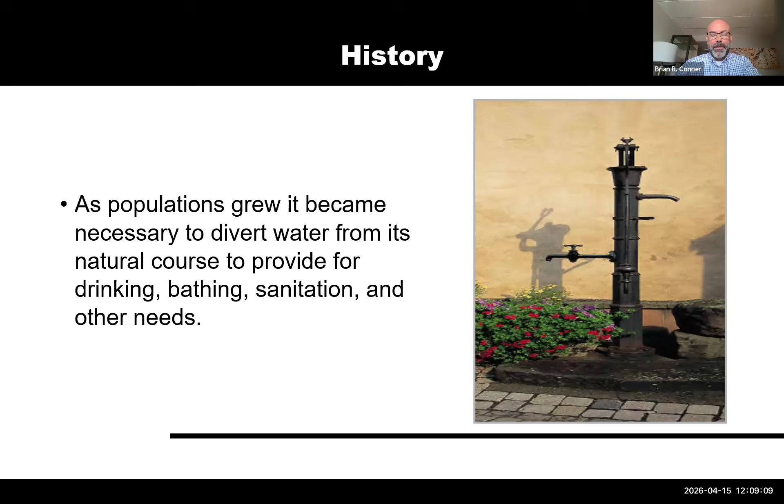As man civilized and population grew, it became evident that water needed to be diverted from its natural course and brought into towns and villages for a number of different things: drinking, bathing, sanitation, and other needs. But not only diverting the water into these areas where people were living, but also taking the water that was used away.

This also illustrates the value that even ancient civilizations found in bringing water into villages for those necessities. The thing is that once the water is used, you have to take the sanitary waste away. It is critical for the health and safety of the inhabitants of villages years ago, and also just as critical for the inhabitants of buildings today where we're bringing water in.

Over the years, aqueducts have fallen out of favor. Nobody is really using those anymore, but folks have been manufacturing pipe and fittings for a really long time. Some, like the aqueducts, served ancient civilizations really well and worked during their period of time until advancements came along. You've had piping systems made of clay, of lead, of bronze, and of wood.

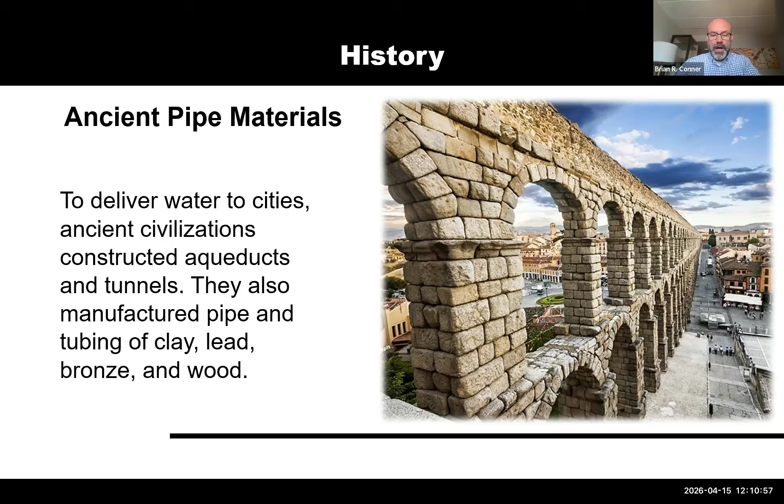Previously, when this product was manufactured and installed, it was coated with tar, so those annular spaces were filled in. But this served to bring water into villages and townships, to deliver potable water to folks for those sanitary needs.

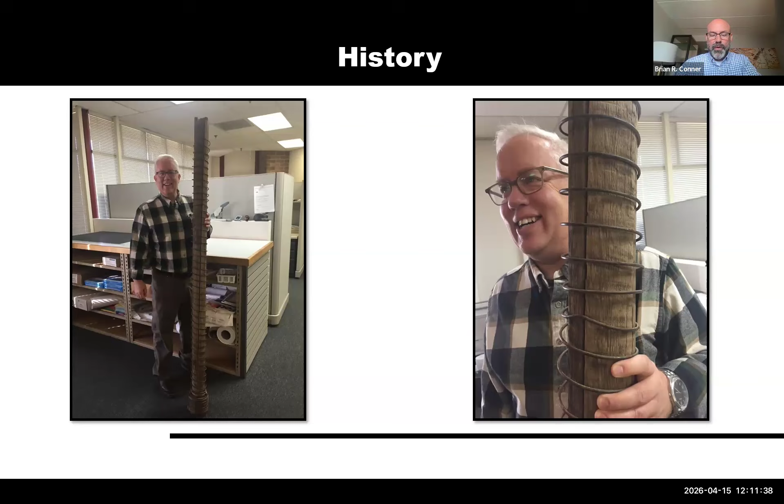Now, obviously, we're not installing lead or bronze, wood or clay pipes much anymore, but a material that's been around for a very long time, cast iron, is still widely used. Cast iron was originally invented by a German cannon maker in Germany in 1455.

So the pipe and fitting system that we all know and love today, mostly referred to as MJ, also known as no-hub pipe and fittings, was invented by a German cannon maker who didn't have much need for cannons. There were no conflicts. He wasn't selling many cannons, and he was spitballing how he could make some money. So he used his cannon molds to make cast iron pipe.

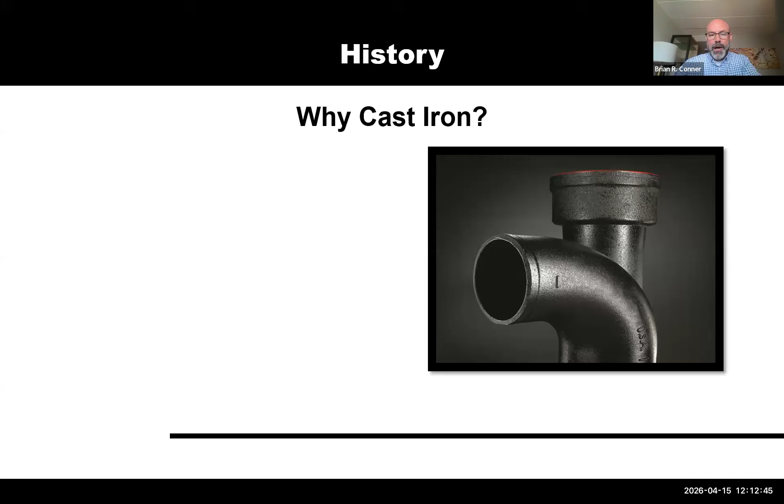And the thing about cast iron is that it has been around for a really, really long time. But in today's environment, some folks have noticed that there are applications that have become corrosive to cast iron and have been causing some breakdown. That's sort of what happened with other materials, lead, bronze, clay, wood. Frequent deterioration made them less appealing, and we don't want the same thing to happen with cast iron. What's interesting to note is that cast iron hasn't changed since that German cannon maker was making it in 1455, in terms of its chemical makeup.

So why is it that now there are some applications that are corrosive to cast iron? Well, things do change, and some of the applications have changed. We're in an age where people are clamoring for low flow fixtures. Since COVID came along, people are really keen to make sure they're sanitizing things, whether in a restaurant, a hospital environment, or even a standard office building. The cleanliness of the building has changed, so there's a lot of aggressive cleaning chemicals going down the drain. And in a low flow fixture building, there's less water scouring the solids flowing through there. The way we've changed the applications using cast iron and other materials have caused an environment that can be detrimental to many materials, not just cast iron.

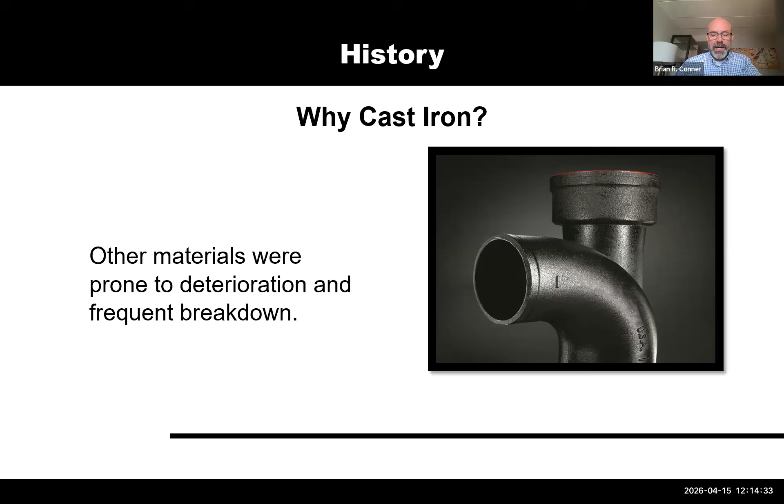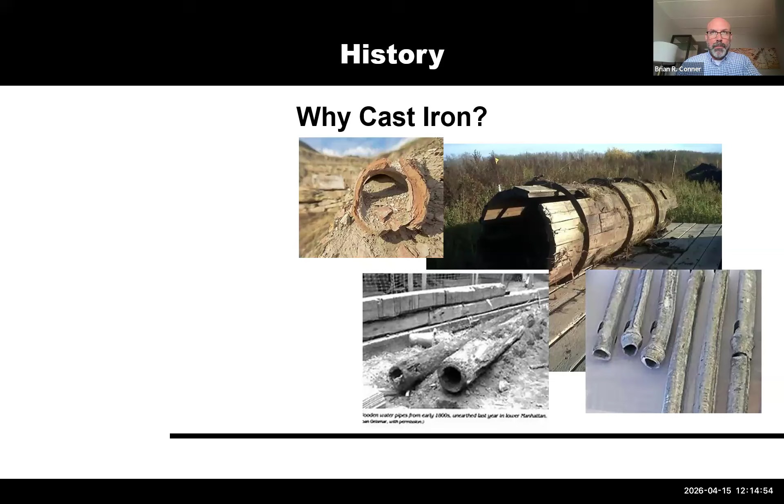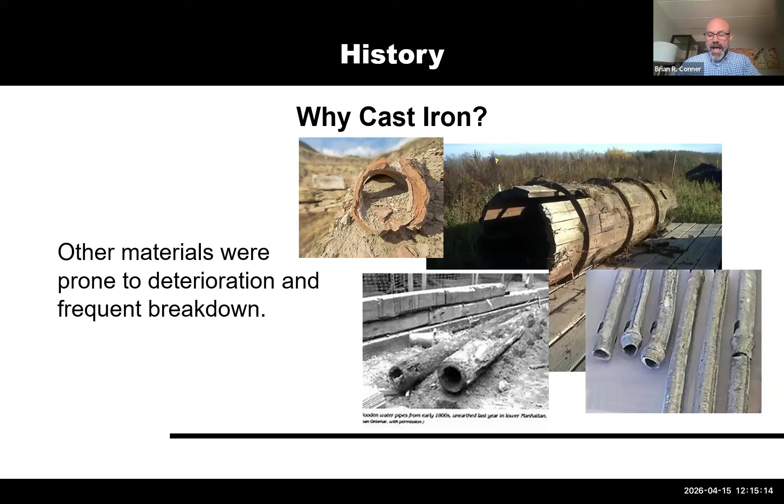But the focus of this presentation is going to be on cast iron and what we can do to rectify it. Before we start, take a look at some others that have predated iron and fallen to the wayside, like lead and wood. They're well documented cases of how those have deteriorated and become historic monuments to the way folks did things before. Cast iron still has its place in our industry. It is still a very durable material, and specifying engineers are still happy to use it. But there are some questions about those aggressive applications and what the industry is doing about it. So we wanted to take you through a presentation, give you a little history, and tell you what the new and most cutting edge technologies are to help use cast iron in the applications you've always used it in. But first, we wanted to highlight a few things that show the durability of iron.

Here's a picture of the Palace of Versailles, which was installed in 1664. On that palace, cast iron, just like the cast iron we use today for drain, waste, and vent, was installed as pressure piping, and it was used for pressure piping from the early 1600s all the way up until about 1900. Then with the advent of sanitary standards for drinking water, cast iron fell out of favor, and now it's not used to convey drinking water, but still used for sanitary use. This cast iron pipe used in the Palace of Versailles is still in service after 362 years and still operating as it was to begin with.

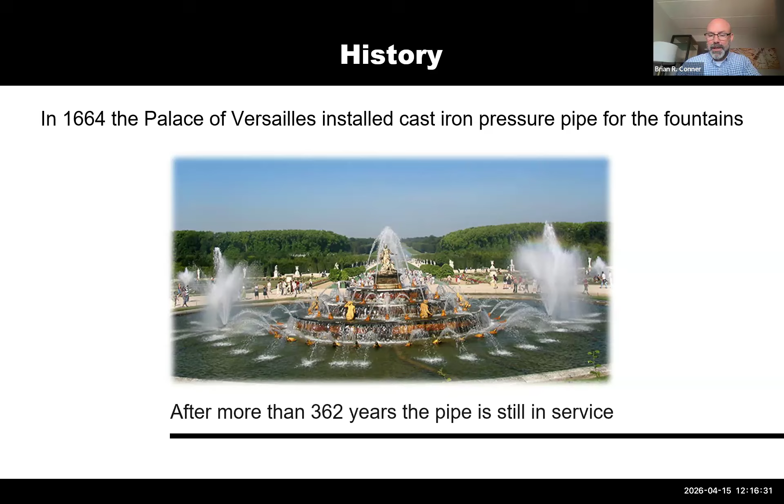So it shows the versatility and also the durability of cast iron. Nowadays, we're not using it to pipe pressure water to any fountains or anything else. We are still, however, using cast iron for sanitary drain, waste, and vent applications, storm drainage, and sewer. For these applications, most commonly in the Canadian market, you would use your no-hub pipe and fittings, most commonly referred to as MJ pipe and fittings for the mechanical joint couplings that connect the pipe and fitting systems. These can be used in above ground or below grade applications, and they're used all over the world for that. Most commonly, folks who intermingle materials with cast iron would use plastic underground for ease of installation, and cast iron or plastic underground and cast iron above ground. The caveat is for cast iron, the temperature limitations are about 100 degrees C, which is really high. But for plastics, it's much lower, around 60 degrees C.

For cast iron, it's designed and rated for gravity drainage. You have to have the sanitary patterns so that the water is essentially told where to go with the sanitary turns. And even though it's not meant for pressure applications, you should test your cast iron system to make sure it is watertight to 10 foot of head, which is roughly around 4.3 psi.

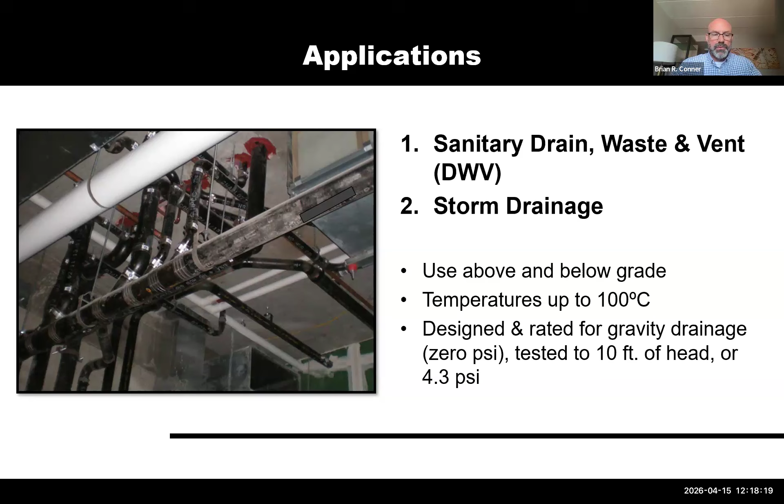Another focal point that points to cast iron itself and how durable it is, is the Smithsonian Institute in Washington, D.C. This is an advantage of cast iron over a lot of materials: its longevity. We're all familiar with the Smithsonian Institute. In 1881, construction was completed. In 2010, engineers and architects began a renovation of the institute, and they did an evaluation of the cast iron pipe. It had been in service now for almost 130 years, and found that the pipe still met the specifications. So it was left intact. The original cast iron that was installed in 1881 is still in the Smithsonian.

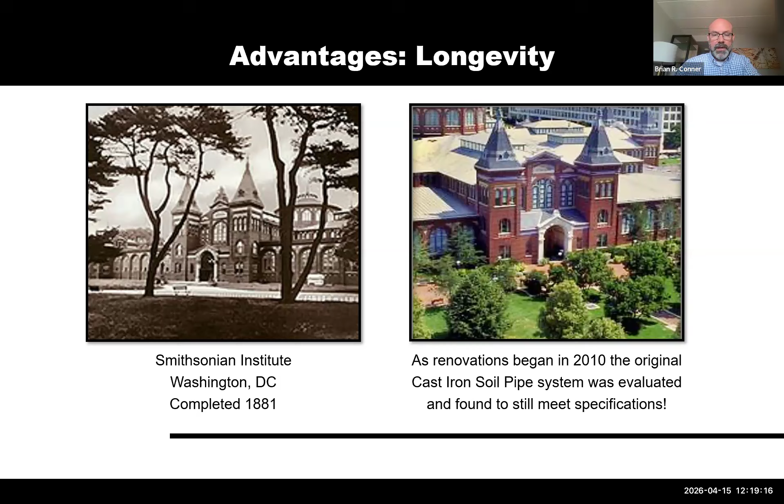There's plenty of other case studies that would show the durability and longevity of cast iron. But there are other things that make cast iron a very attractive material. One of those is sustainability.

Every piece of domestic cast iron manufactured in North America is manufactured from 96% post-consumer recycled scrap, and all cast iron is 100% recyclable. So in this day and age in North America, nearly everything made from cast iron was formerly some other form of cast iron, whether it be an engine block, a brake drum, or a radiator heater.

Or maybe even cast iron soil pipe on a building that has been demolished. The other 4% of that equation that is not the 96% post-consumer recycled are just additives that have to go into the manufacturing process to keep the chemistry right, and also to process the material itself. So a little bit of shredded steel, some coke for heating, and things like that. But all of the cast iron in the production of domestic cast iron or North American made cast iron is recycled cast iron.

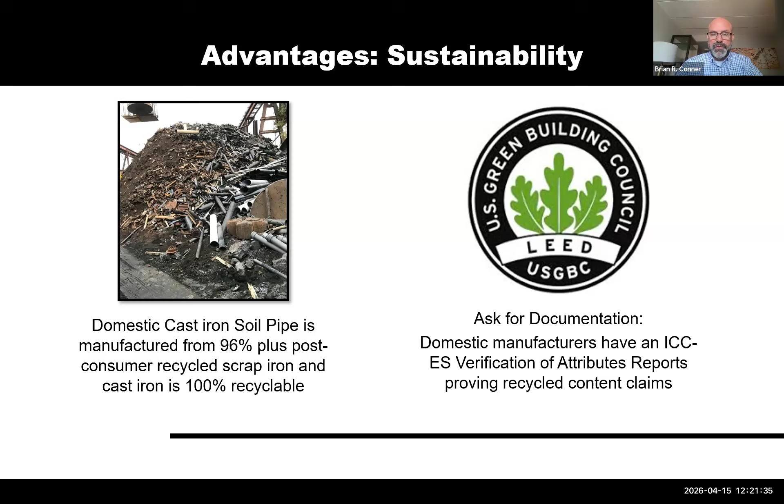Now, manufacturers also in North America have ICC ES verification that shows that their product is made domestically and is 100% recyclable, and that they use recycled content. And you can ask your domestic producers for that verification document from ICC.

Joining cast iron: there are essentially three different types of cast iron soil pipe that are commercially available. One is the MJ style, which we've mentioned multiple times, also referred to as no hub. But another is service weight or hub and spigot. This hub and spigot style comes in a standard service weight or in an extra heavy.

The extra heavy is most commonly used where you have a really large live load or an extraordinary earth load on the pipe, and you need that extra external pressure bearing capability. What comes to mind would be near railroad tracks, loading docks, or an airport as a great example of where extra heavy cast iron is used.

So for your service weight and extra heavy, they're both hub and spigot styles. Charlotte Pipe still manufactures both styles and has them in inventory. We're a manufacturer that manufactures all of our products for inventory; we do not manufacture for job specific orders. So everything that you see in our catalogs, we have in inventory.

But for joining your service weight or hub and spigot pipe and fitting systems, there are two separate joining methods. One is the old style, which is lead and oakum. Oakum is a burlap type material that is woven and wrapped around the spigot end of the connection and packed into the hub, and then molten lead is poured in on top of the oakum to hold the oakum in place.

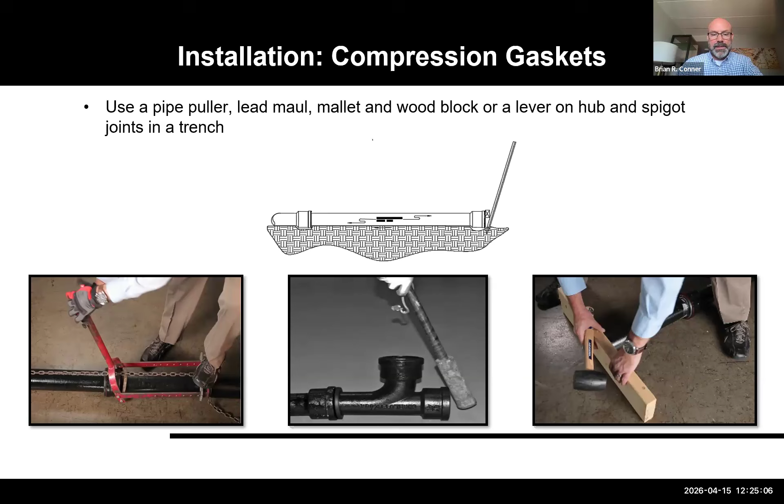For MJ style, you have a no hub coupling, which uses a 3/16 stainless steel shield and a neoprene insert gasket. The neoprene gasket has a center stop so that you get equal coverage on both your pipe and your fittings when you're joining the pipe and fitting system. The stainless steel shield would slip over the gasket, and then it's tightened through worm gears on top.

Now, here's an important note on MJ couplings: these are torque sensitive worm gears. A standard coupling uses 60 inch-pounds to tighten these worm gears down. For your heavy duty couplings, depending on the manufacturer, you've got different torque requirements.

Most installers do not know that this is an issue that the manufacturers of the couplings need addressed. Most installers use your standard drill motor and tighten those things down and move on. But to get these things locked in place to the proper torque on a standard coupling, you should use a 60 inch-pound torque wrench.

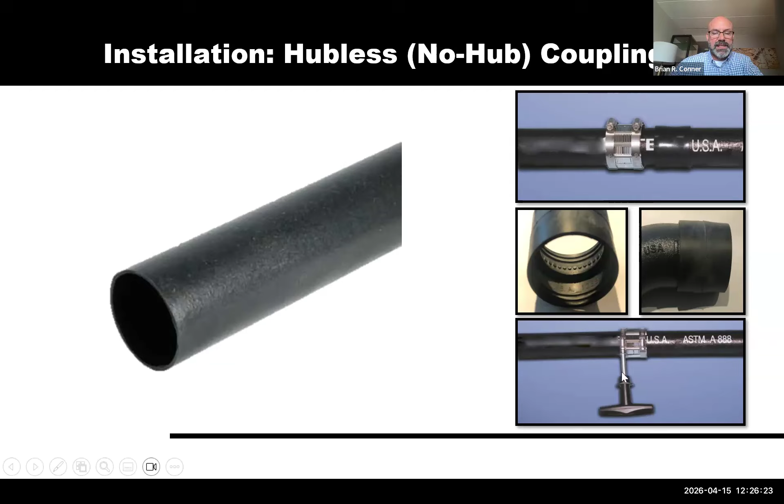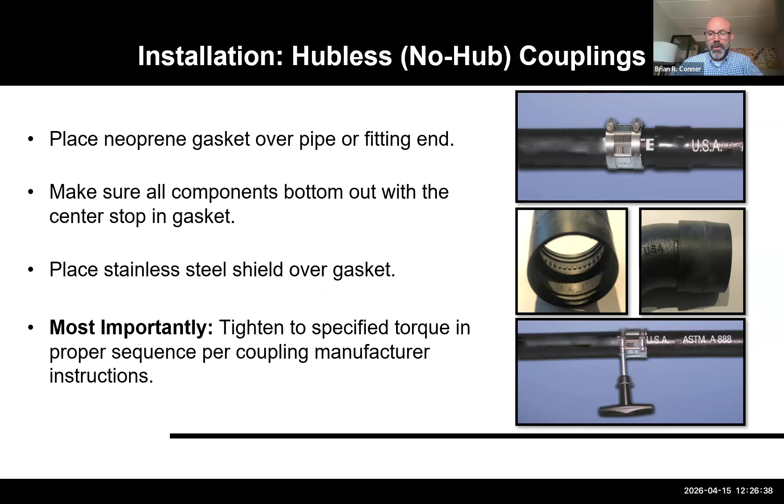So you're going to place that gasket over the pipe and fitting, pull your sleeve over, and then tighten it down. This is the most common way to install your MJ couplings, and it's the most common piping system used with cast iron.

Now, there are many manufacturers that make tools designed specifically for this task. Milwaukee Tool actually has a tool specifically for tightening down MJ couplings. It has a 60 inch pound torque setting, and it uses a lithium ion battery so there's no loss of power until it just dies. So you've got 60 inch pounds, and then it can rotate to 80 inch pounds.

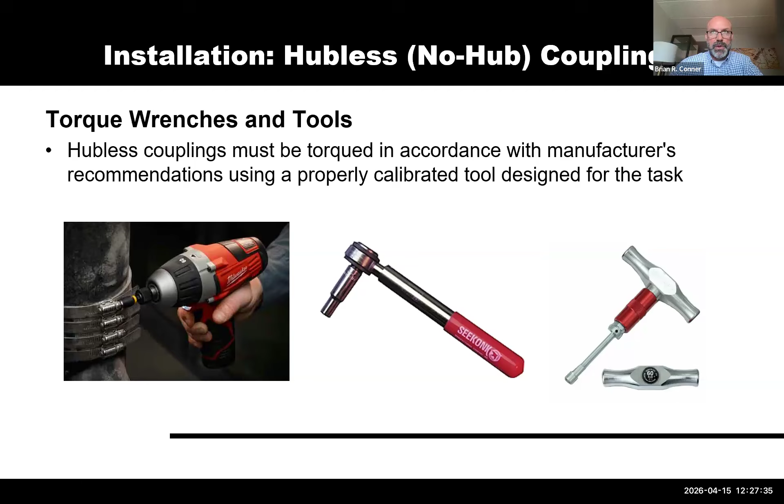Most commonly, heavy duty manufacturers use 80 inch pound coupling torque worm gears, but some have 120. So you need to make sure that when you're specifying a heavy duty coupling, you include the installation instructions for that coupling.

Also, unknown to most installing contractors, there's a tightening sequence for heavy duty couplings. These MJ style couplings, depending on the manufacturer, could require a torque sequence that goes left to right or vice versa, but in some cases we see inside to outside. And this is critical so that there's no crumpling or bunching of the knurled stainless steel you see on many of the bands, and so that there's no bunching or creation of a pathway for the neoprene gaskets.

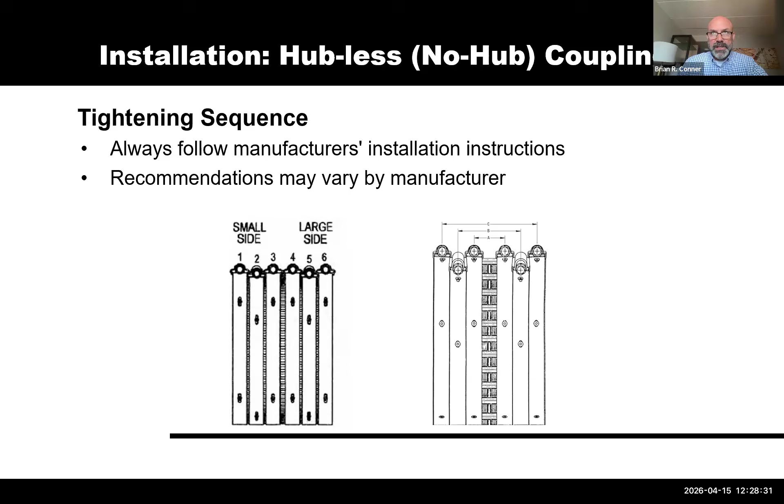However, most coupling manufacturers have special colors that signify their trademark coupling. So in this instance, we had a contractor who reached out to us and said, 'Hey, I'm having some leaks on the joining between pipe and fittings. Can you give me a couple of ideas of what it might be?' And so we went through the list, and I asked for a photo.

I've identified three separate coupling manufacturers in here, and with that you have three different tightening sequences. You have two different hex head sizes for the worm gears, and you also had two separate torque requirements for these couplings. So I asked the installing contractor what he was using to tighten these down, and he said a standard drill motor—he was just using a drill.

And once we confirmed with him what the tightening sequences and torque requirements were of the couplings, he had no more leaks. So this is important: if you could avoid intermixing the couplings, you would only have one tightening sequence and one torque requirement from the manufacturer.

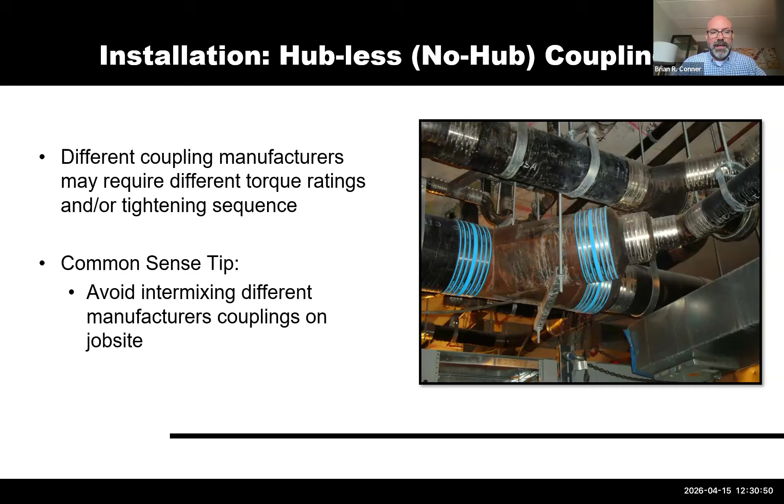Now, this brings us to the coatings for cast iron, because coatings are important when you're talking about both installation and longevity of the material, but maybe not always for the reasons that you think. Now, in the 1950s,

a cast iron manufacturer from Europe brought his piping over to North America to try to sell it, because he had the capacity in his plants. And when installers saw his pipe, they were like, 'Wow, this stuff really looks great.' Previous to seeing his material, the cast iron you got most often had no coating on it. The coatings are almost always cosmetic. And what most in North America were doing was either no coating or just some standard asphalt coating.

But this European manufacturer brought his coated material over, and because of the look of it, it incentivized the rest of the domestic manufacturers in North America to begin coating their product. Cast iron is a really durable material and has great corrosion resistance without the coatings.

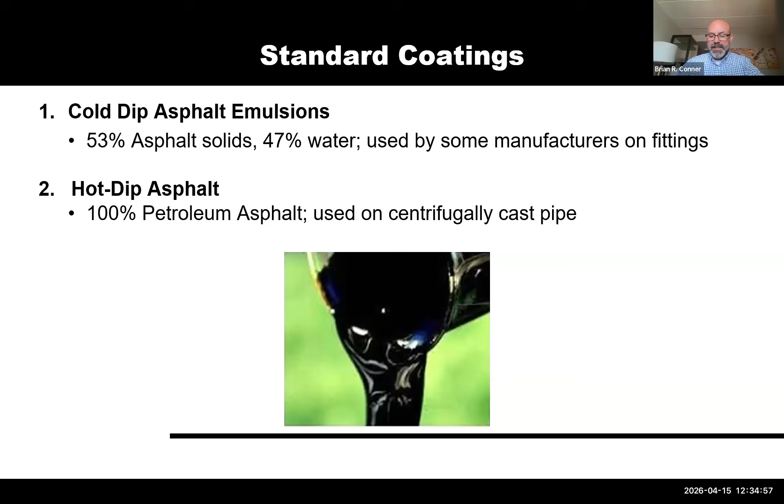Now, the reason this is important, again, as I said at the beginning of our presentation, is that while standard cast iron is still appropriate for 95% of the applications we've used it on for hundreds of years, there is 5% of applications now that have become particularly aggressive towards not only cast iron, but other metallic piping systems. That's because of the pH range of the fluids now being used or introduced into DWV and storm applications. What you'd typically expect in a DWV system is a pH range from about 5 to 8.

But your standard cast iron can handle that range, actually all the way up to 10. So your normal applications are well within the limitations of standard cast iron.

Now, when these effluents and the pH limits of standard cast iron are exceeded, there are enhanced coated cast irons now. From Charlotte Pipe, we manufacture a product called Edge HP. The HP is for high performance, and it's a little bit of a play on the pH levels as well. Whereas normal cast iron can handle a pH range from 4.3 to 10, our enhanced coated cast iron can handle a pH range of 1 to 13 — many, many orders of magnitude above what standard iron can handle.

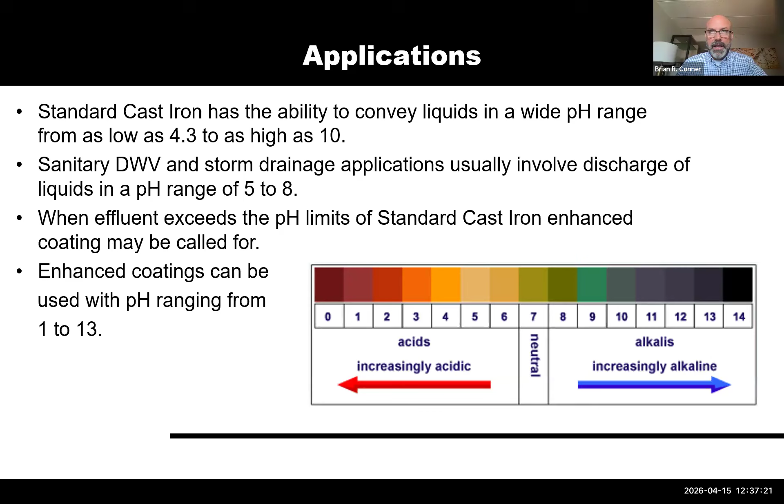This coating is an epoxy e-coat. Similarly to how we coat all of our standard fittings, we do a cathodic and anodic epoxy e-coat on our pipe and our fittings for Edge HP, both on the inside and the exterior of the pipe, giving enhanced corrosion protection to both internal effluents that might cause corrosion and any external threats that may come in contact with cast iron.

So this chart gives you an idea, from 1 to 13, of the sort of fluids that enhanced coated cast iron from Charlotte Pipe can handle.

And the important thing to note is that both internally and externally, the Edge HP can handle these pH ranges, and you're not typically going to see lemon juice or tomato juice or sodas or even concentrated bleaches come in contact with the exterior of cast iron pipe. But what you may see are hot soils.

You may see in parking garages the salts and chemicals used to treat roads in icy conditions being brought in on vehicles. This e-coat is very similar to the way the underneath of your Chevy pickup is coated to protect it from the same sort of environmental corrosion.

Now, just on the model code — yes, sir, do we have a question before we go too far on in the pH scale there? I think the part that's really come up consistently is that, of all the pictures we had in the chart, uric acid is not listed there.

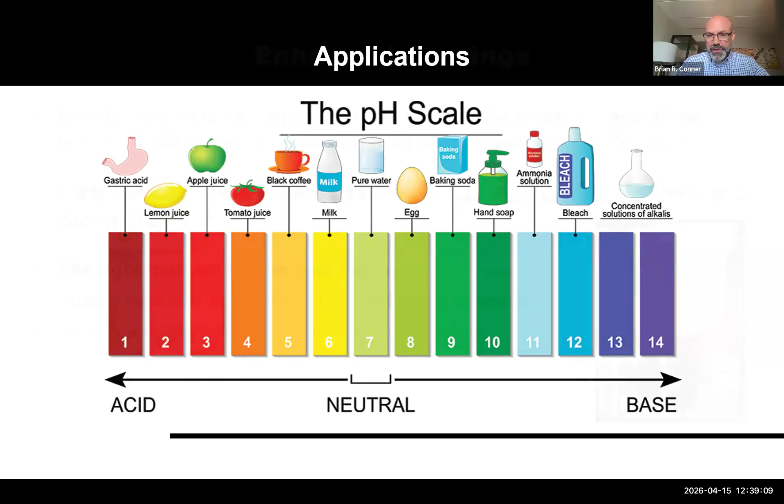Where does that typically fall in terms of pH, and how do the various levels of pipe handle higher concentrations of, say, uric acid? So here's an important thing to know about uric acid or any types of acids: the code requires special waste piping for applications where you're conveying anything that cannot be discharged straight into the sanitary sewer, and uric acid would be included in that, or any acid.

So while this piping system can handle pH ranges from 1 up to 13, it doesn't meet the standard for chemical and acid waste. The code is very prescriptive in its language, requiring a special waste piping system for those applications. I'm not exactly sure where it falls on the pH table, but if you're conveying uric acid or any types of acids, or special or chemical waste, you're going to need piping that meets the National Plumbing Code of Canada for that application.

Anything that has to be diluted before it goes into your storm drain is considered special waste, and this piping system, while it might be good for an application like that, doesn't meet those standards. One doesn't exist for standard cast iron, even if it is enhanced coated. So where you might see aggressive chemicals - we'll get into that - where an edge or any type of enhanced coated cast iron should be used is going to be outside of your special waste type applications. Does that make sense, Zach?

Perfect. Well, we'll let you continue on because I know I'm probably distracting you from wrapping up. No, not at all. Thanks for the questions.

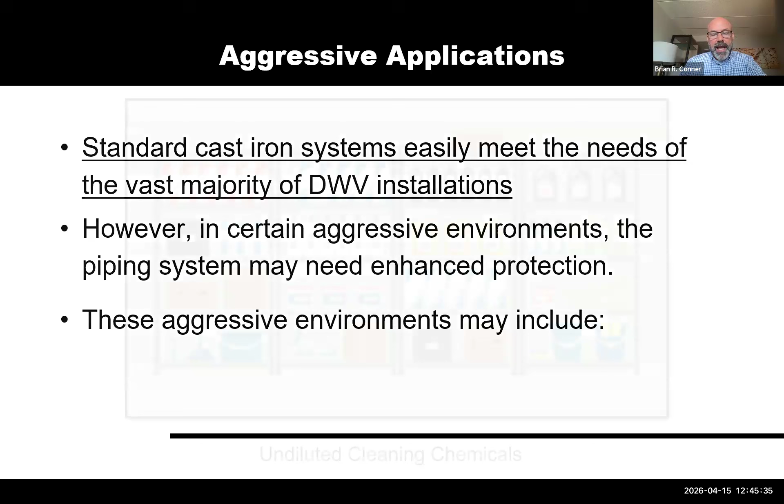So this is essentially what I just mentioned, that standard cast iron easily meets the needs of the vast majority of DWV installations. But you do have a lot of applications now that are getting high quantities of undiluted cleaning chemicals.

Hospitals are one that comes to mind immediately, since, again with COVID, hospitals are very worried about the spread of disease. In these hospital applications, every fixture is a low flow fixture, and compounding the fact that low flow fixtures are putting less water in to self-scour these drains is that hospital personnel are seldom washing their hands anymore when coming in to treat patients. What you'll see if you've been unfortunate enough to have a loved one in the hospital recently is that a nurse or doctor will come in, take one or two pumps of hand sanitizer, treat the patient, then take one or two pumps of hand sanitizer on the way out of the room. Very few people are putting water down the drain in a meaningful way that is self-scouring the drains.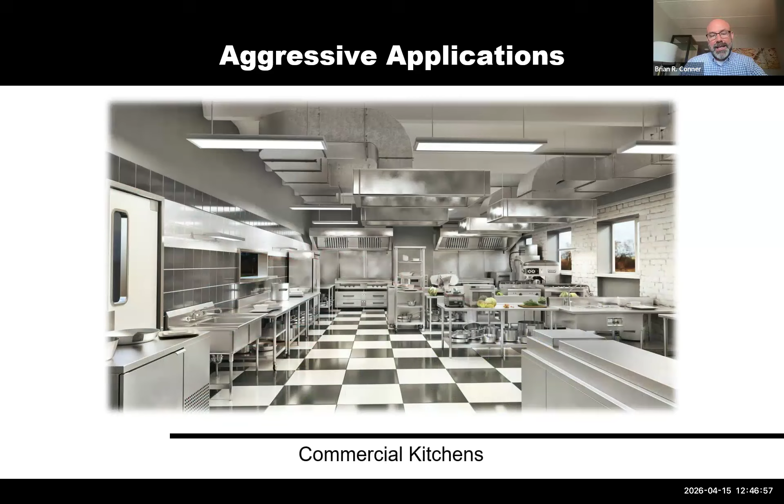Also, within hospitals, you've got commercial kitchens. And anywhere there is a commercial kitchen, there is a chance for corrosion. The reason is that grease waste itself is not injurious to cast iron, but the sewer gases and hydrogen sulfide gas created by solids being left behind, especially in commercial kitchens, can be extremely corrosive to metallics, all metallics. They're using aggressive cleaning chemicals and putting less water into the piping system. In some cases, corrosion is being caused by solids from waste left behind. If you guys can point me to a commercial kitchen that is cleaning their waste traps out as they're supposed to, it'll be the first one I've ever seen. These grease wastes create an environment where solids are left behind, it creates microbes, and the off-gassing can be very corrosive.

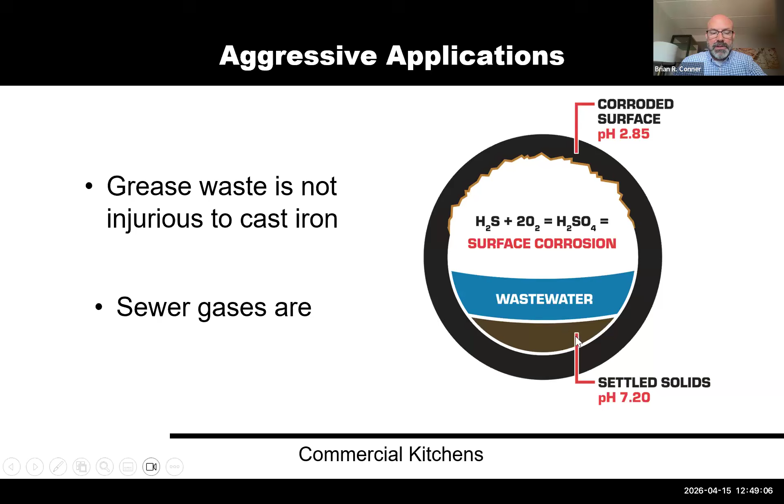So commercial kitchens are one where these enhanced coated cast iron products have been specified with great success, because they have the ability to handle pH ranges many orders of magnitude above that of standard iron. Here you see hydrogen sulfide gas has eaten away at the pipe at the top of this demonstration, and the pH of that corroded surface was measured at 2.85, below the pH threshold for standard iron, but well within the threshold of enhanced coated cast iron. Here you've got settled solids under the waste stream from a commercial kitchen, where the pH is 7.2. That's no problem to either standard iron or enhanced coated cast iron, but the wastewater covers that up, so it's not allowed to dissolve and penetrate the iron. So it's something to think about.

Another application where you're getting really aggressive installations is casinos, resorts, and hotels, because of low flow fixtures, cleaning chemicals, maintenance personnel flushing these chemicals down the drain without flushing water behind them, and soda fountains and bar sinks that have really acidic fluids flowing into them. So what we'd recommend is using maybe an enhanced coated fitting or two, a P-trap, and a couple lengths of pipe until downstream, until more water is introduced into the system to flush that down and dilute it. Then you can switch right back to standard iron.

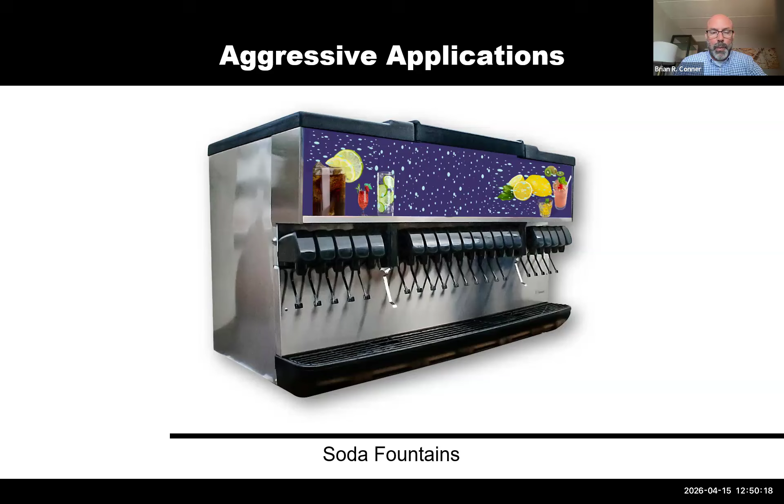These aggressive applications, think about the soda fountains I mentioned a second ago. The pH range of soda is such that you can drop a 16 penny nail into a liter of soda, and within a week it is totally dissolved. So quite aggressive. Most of us don't think about it, but the pH levels of juices are down around 1, 2, and 3 depending on the juice, which is very acidic and causes a lot of damage to metallics, which is why in commercial kitchens most of the material used on any surface area where they're prepping things is going to be stainless.

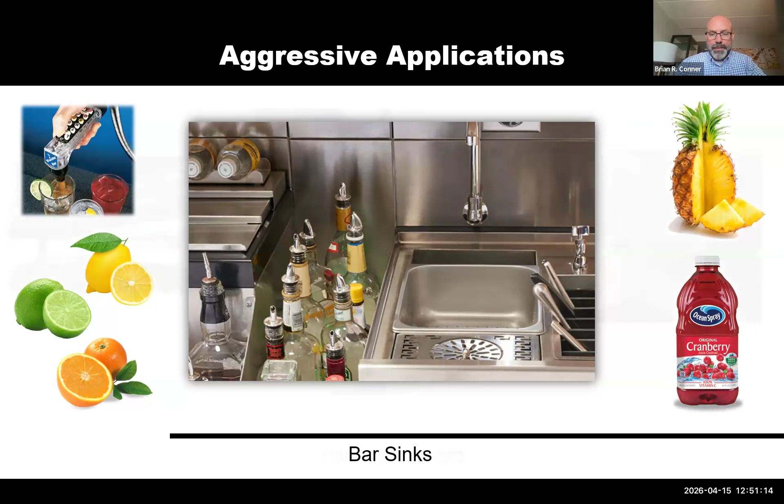If you've thought about an application that is particularly aggressive and using stainless steel for drainage, enhanced coated cast iron is your answer, and it's going to be much cheaper than stainless steel pipe.

Parking garages is another really big one where engineers are starting to specify enhanced coated cast iron. Here you can see a length of our Edge HP that's been installed in a parking garage where the salts and chemicals from the roads have been able to come in and cause havoc on the traditional cast iron systems.

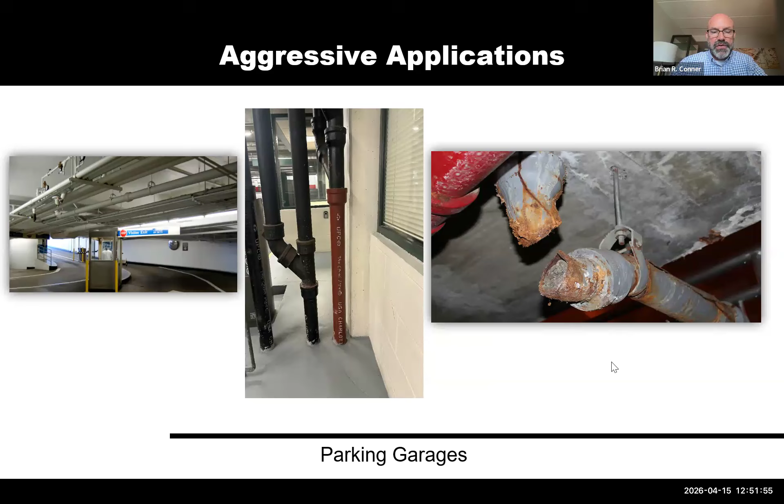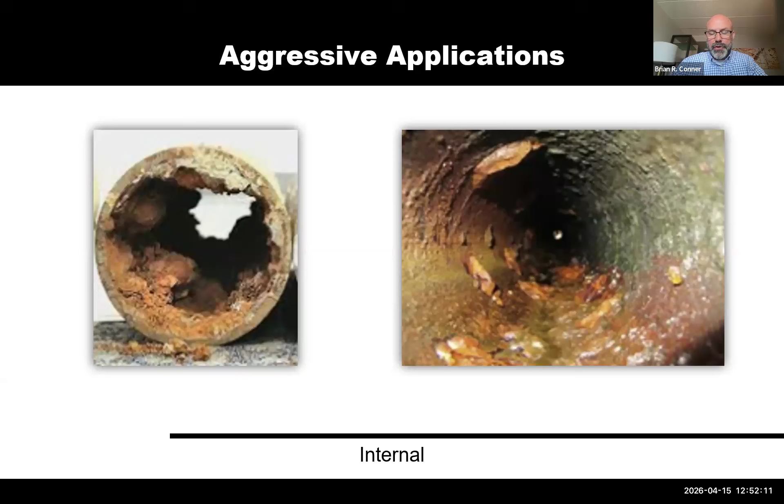Parking garages near salt water, where you've got a lot of salt air going through, have been really aggressive for metallic piping systems for a long time. These enhanced coated cast iron systems are really good in those applications. Here's just some internal corrosion that you see from those salts picked up on the road and the chemicals that are used from municipalities treating the roads.

Also, some aggressive applications come from the soils. There are some hot soils where in the past you would think about going to plastic, or if using standard iron, you would wrap it with a polyethylene wrap because of the acidity level of the soils themselves. Here you can see they're replacing standard iron with our Edge HP in a trench where those hot soils have caused corrosion. So in the past you'd think about PVC Schedule 40 as a replacement, but in this example this was a pretty deep trench.

So they were worried about the loading on plastic pipe. Plastic, again, we manufacture both, so we're uniquely qualified to speak on it. Plastic pipe in and of itself is not very structurally strong, and it relies heavily on proper bedding, backfill, and side compaction of the earth for its structural strength. You can think about PVC much the same way as corrugated road culvert - it really needs the earth for its structural strength.

Plastic pipe, many of you may not know, is considered to be in a failed state when it has deflected more than 5%. So it's very critical that plastic pipe is buried to ASTM D2321, the standard for thermoplastics burial underground for drain waste and vent applications. It gives you the proper way to bury pipes so that you don't have a collapse of the pipe, and so that it doesn't deflect in a way where you get infiltration or exfiltration. So they chose to go with cast iron with enhanced coatings for replacement of the pipe in that hot soil.

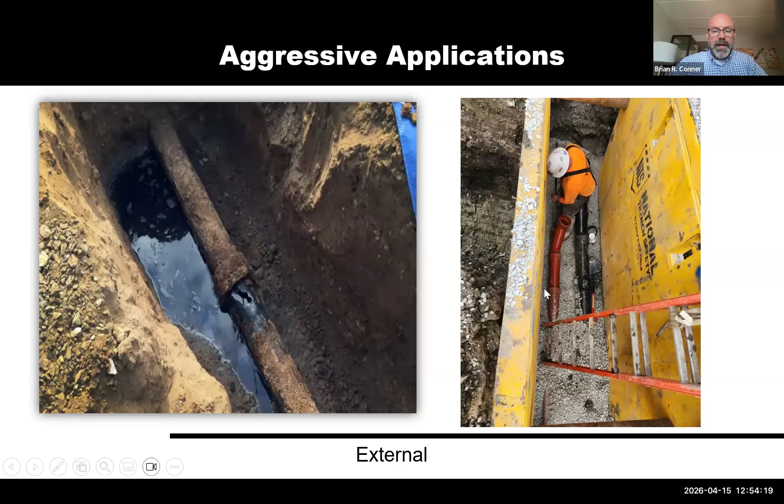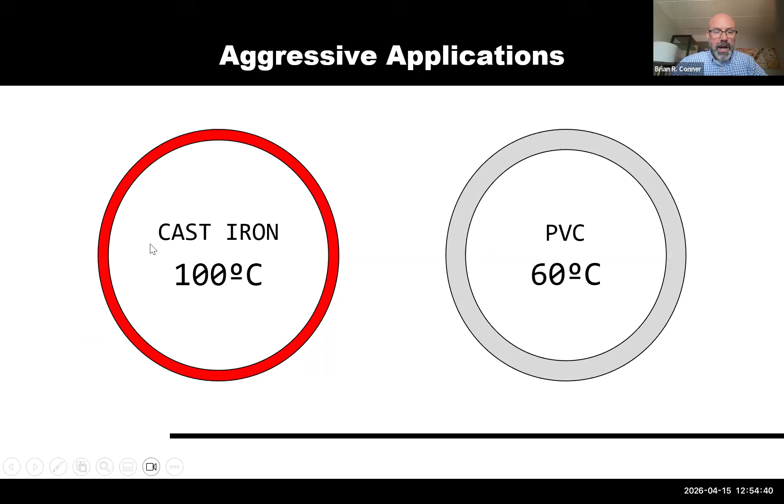Another reason why you may choose to go with iron over plastic pipe is that PVC and ABS pipe have a maximum working temperature of 60 degrees Celsius, where iron can handle 100. This is especially critical if you start thinking about aggressive applications like commercial kitchens. If you have dump pots for pasta, you're going to exceed the working capabilities.

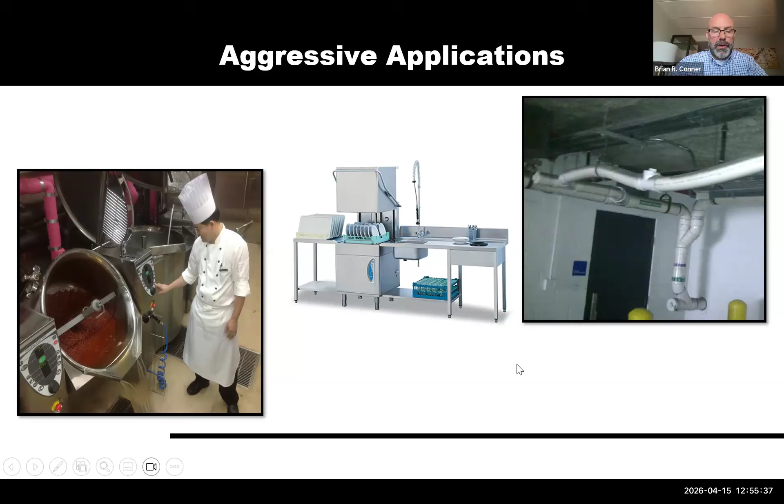So some have asked me recently, what about CPVC pipe? Because it can handle those hot temperatures like cast iron. CPVC can handle up to 104.4 degrees, even above what cast iron can handle. The problem is that there is no CPVC pipe for standard DWV. We manufacture a CPVC pipe for chemical waste.

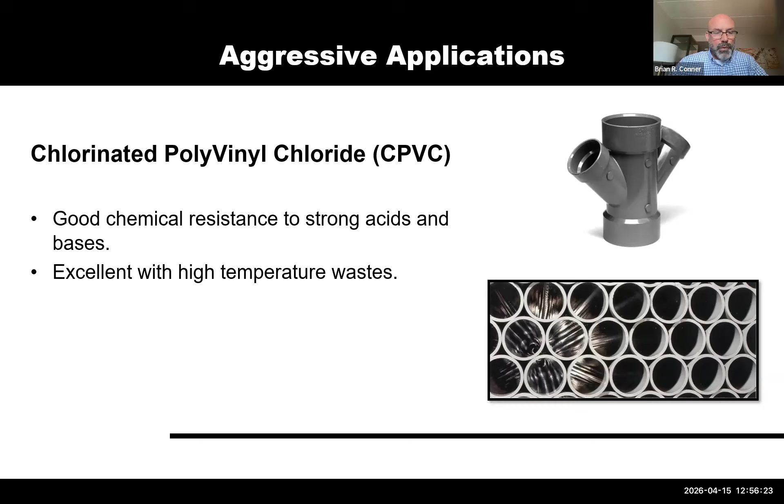It meets CSA B181.3, but it does not meet CSA B181.2, which is the standard for plastic DWV piping. It's really good with chemical resistance, very good with strong acids and bases. It can be used for your chemical waste along with polypropylenes or PVDFs or even the borosilicate glass that was mentioned earlier, but it's not listed for DWV.

And CPVC, while it's great with chemicals, very good with acids and bases, it can be damaged by fats, oils, and greases. So you can't use it in commercial kitchens because the most naturally occurring oils actually act as stress corrosion cracking agents with CPVC. You can look at manufacturers like Charlotte Pipe, George Fischer, or Spears, and they actually reference the chemical damage caused by fats, oils, and greases with CPVC pipe.

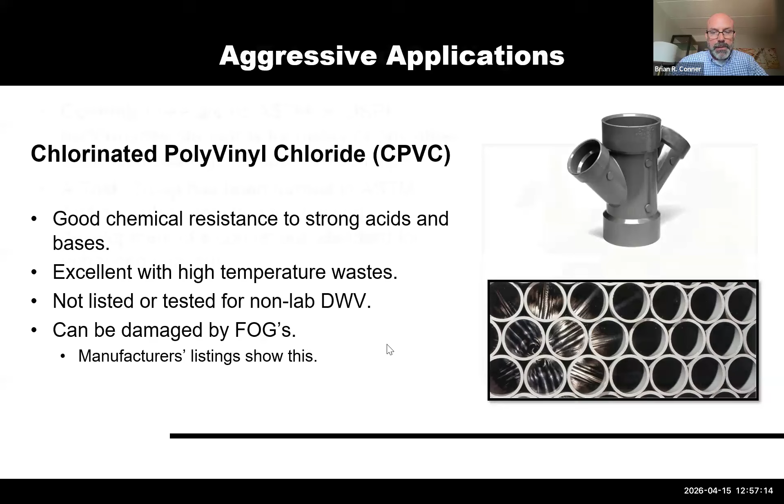Now, enhanced coated cast iron really is not new.

You might be hearing about it for the first time, but Charlotte Pipe has had their Edge HP on the market now for 5 years, and others even longer. There is a standard for enhanced coatings that comes from Europe. It is EN 877, and ASTM is addressing this in North America.

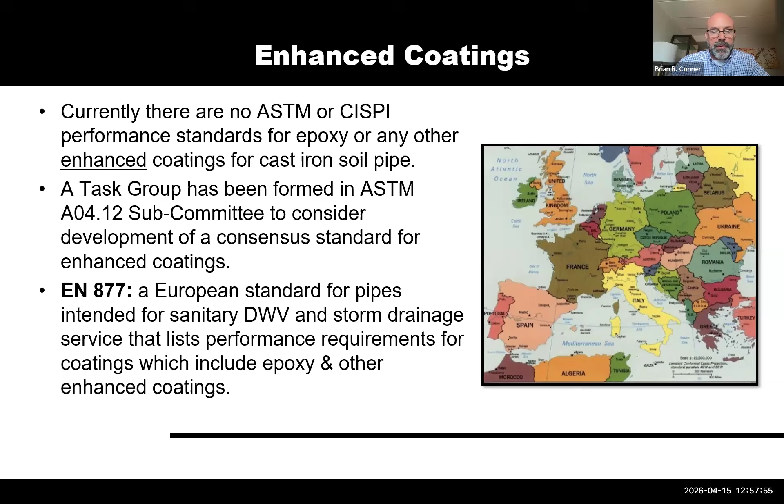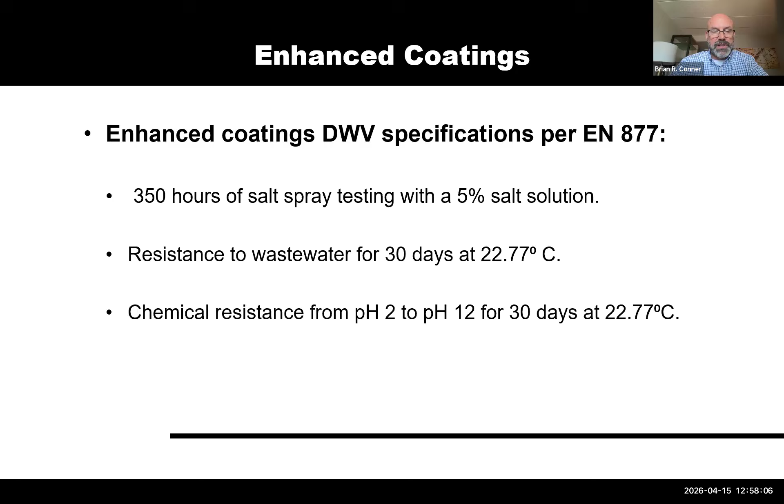The EN 877 is a durability test standard for enhanced performing coatings, and essentially what it does is test the coatings for salt spray to make sure it can handle those aggressive applications, for resistance to wastewater, and then chemical resistance all the way from 2 to 12.

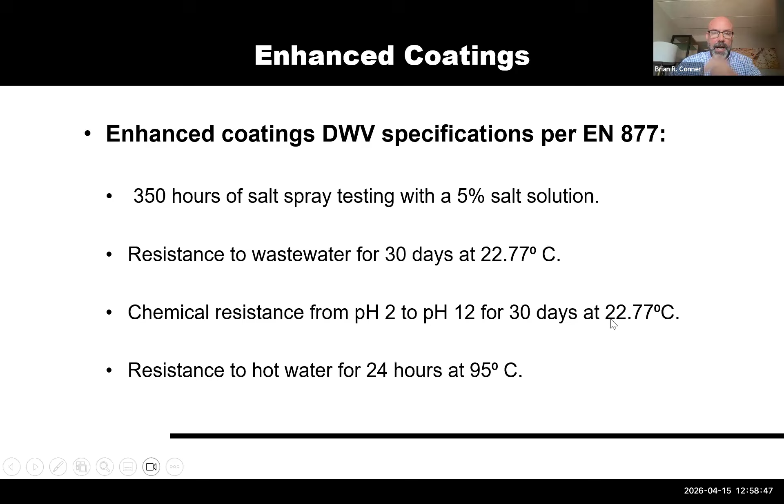What we have done at Charlotte Pipe is taken the requirements of EN 877 and incorporated it into the listing for our products, and we've doubled the test. Where EN 877 requires 350 hours salt spray, we test to 700. Where it's checking for resistance to wastewater at elevated temperatures for 30 days, we go double that. We've checked the chemical resistance all the way from 1 to 13. So everything that EN 877 requires, we exceeded that with the testing of our Edge HP coating.

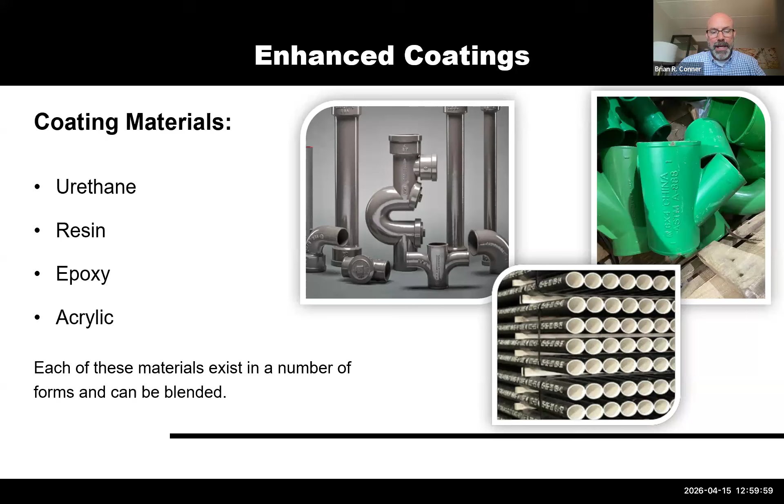The offshore folks from China also adhere their coating in a different way. We are the only ones who use the E-coat, which makes sure that the coating is electrostatically adhered to the substrate so that there can be no delamination, and others have not used that technology. Because of that, there is ability for some of the others in the market to have delamination because the chemicals or aggressive effluents can get in between the iron and the coating itself, and cause corrosion. So just make sure that if you're going to specify an enhanced coated cast iron, you understand which one and how it is adhered to the pipe.

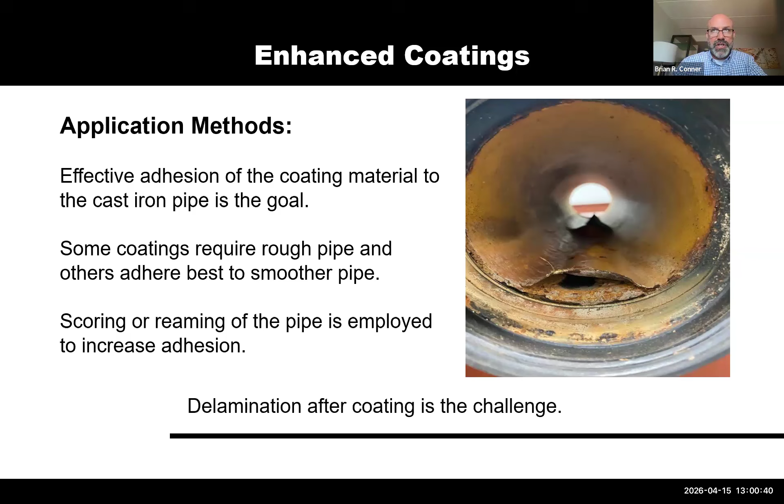So delamination of the coating would be challenging for the overall health of the system. Also, because of the way some of these coatings are used, snaking the piping system out can be problematic. So again, I would just recommend that you do your due diligence if you're thinking about specifying an enhanced coated cast iron that's outside of the one that Charlotte manufactures in our Edge HP.

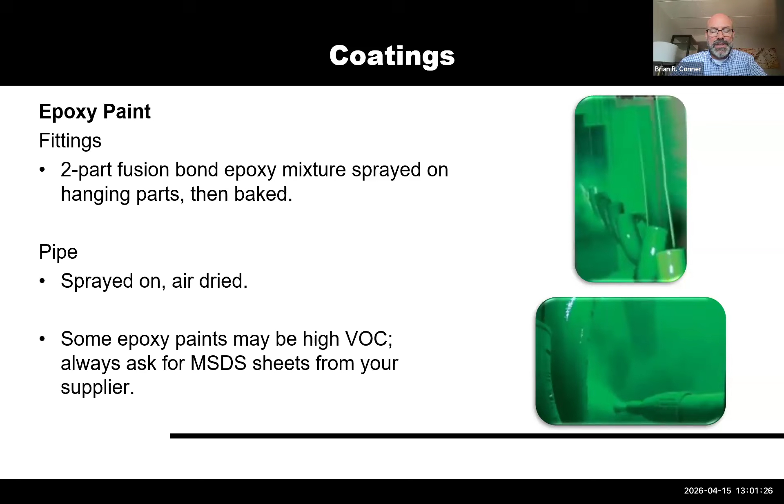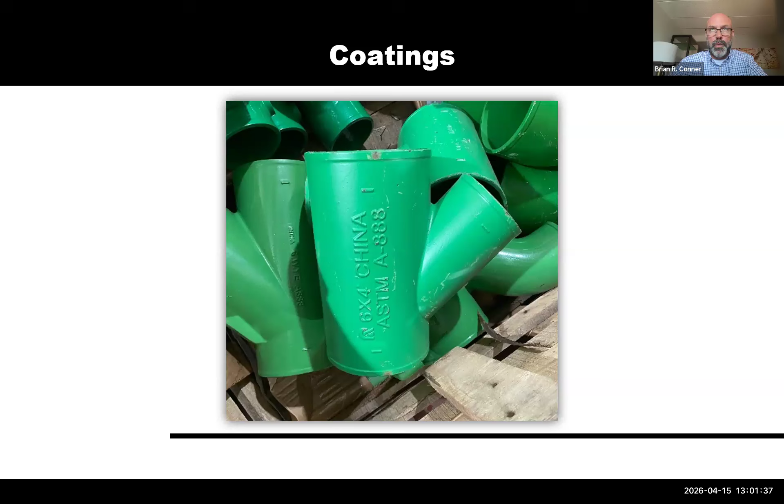So with the offshore, again, it's a two-part fusion bonding epoxy mixture that's sprayed on and then baked on for the fittings. And then with the pipe, it's sprayed on and air dried. You also may want to ask for MSDS sheets just to check the VOCs of the supplier of those pipe and fittings. Sometimes those VOCs exceed what is acceptable in North America.

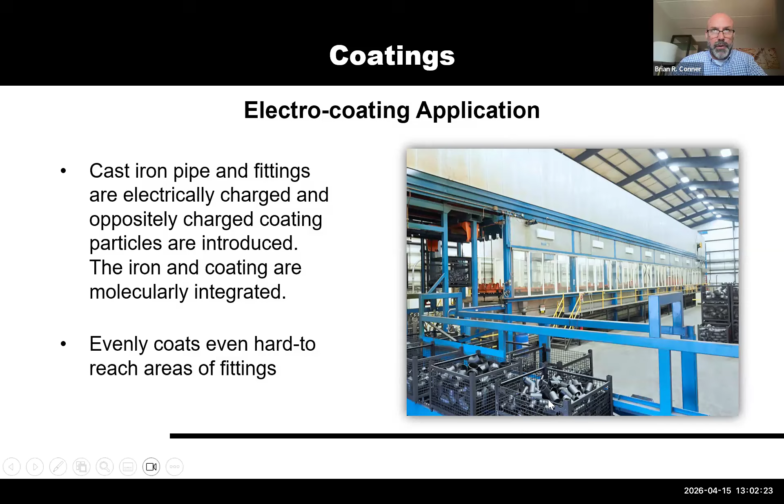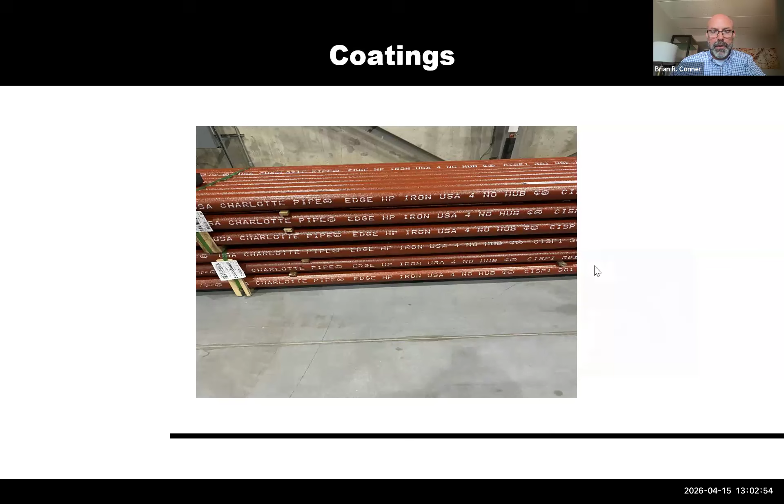Here's just a photo of the pipe. You can readily identify the Edge HP of Charlotte pipe from its burnt orange color. And we did that so that we could delineate between our standard fittings, pipe and fittings with the standard color, so that no one would confuse the two and intermingle them if they didn't mean to.

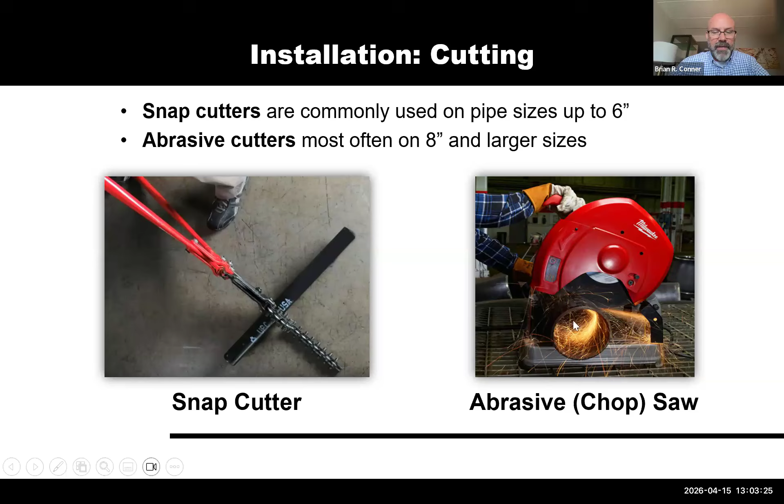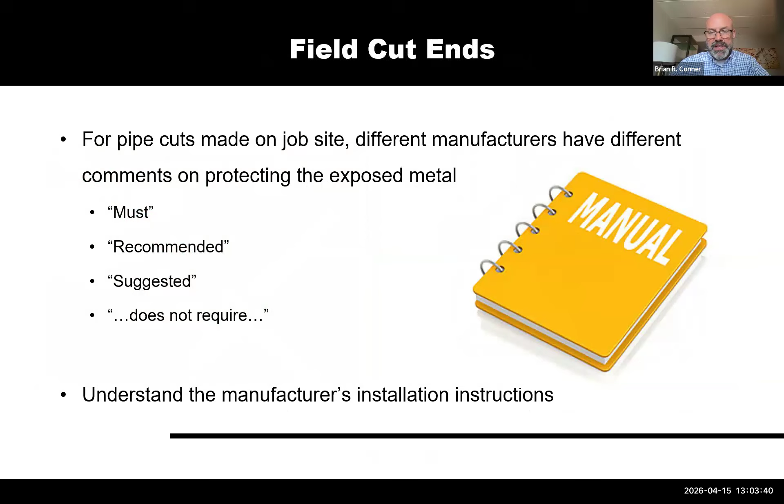Another thing that we need to cover here is through all of the enhanced coated manufacturers of cast iron, they have different recommendations for cutting their pipe and fittings and then treating the cut ends. So the most common way, as you all know, for cutting MJ pipe is up through 6 inches with snap cutters. Above that, most often folks are using an abrasive chop saw. No matter how you cut your pipe and fittings, you want to check with the manufacturer to make sure whether they recommend protecting those exposed metals from the cuts, with the importers and the other North American manufacturers.

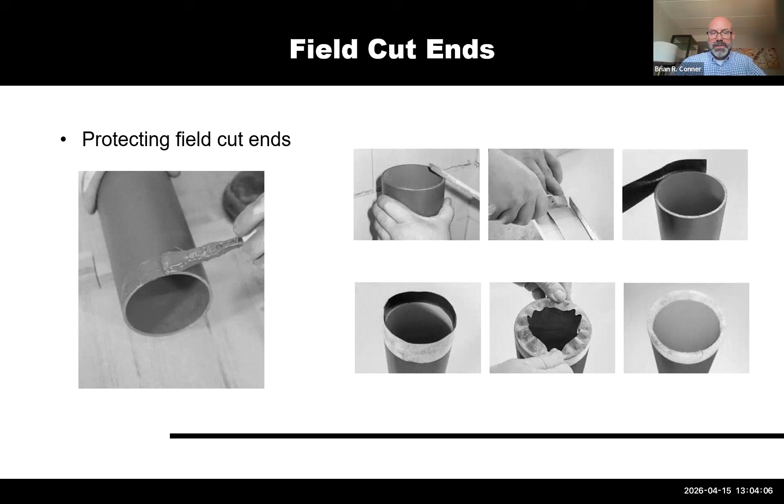They recommend that you protect the cut ends because the way they cut their cast iron, there is potential for delamination if fluids get in between the material and the coatings. But with Charlotte Pipe, we do not recommend protecting those cut ends. They're already protected, and because of the e-coat, there's no way for fluids to get in between the substrate and the coating itself.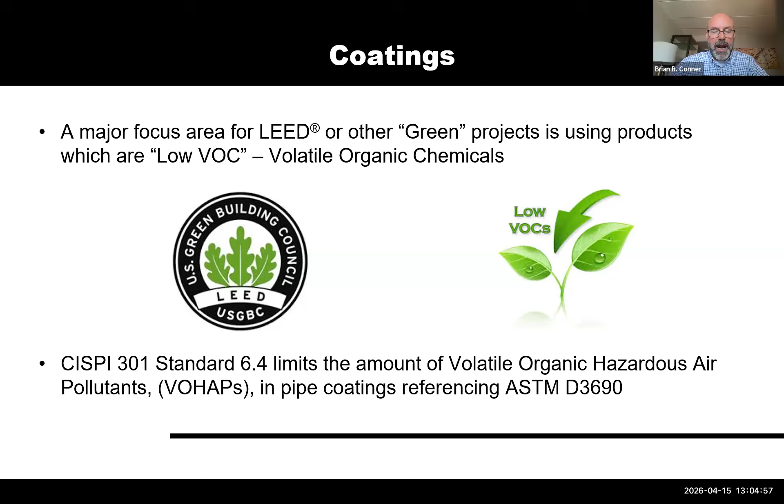Our e-coat is low VOC, and most of the green rating systems out there, like LEED from the USGBC, are very particular about low volatile organic chemicals. The standards we manufacture to use low VOCs in both our standard cast iron coatings and our Edge HP. So the standards require it, and we meet it.

So I got kind of quick there at the end, but I wanted to make sure I left time for any questions. Just to reiterate, this is an ASPE accredited CEU presentation, and you will receive continuing education credits for participating in this webinar today. Are there any questions from this presentation, or anything I may not have answered that you're interested in? Nothing's coming in so far.

I think first of all, thanks — that was fantastic. I really enjoyed it, because cast iron pipe is so commonly just assumed to be equal, equal, equal, without really understanding the different features available within a manufacturer and from manufacturer to manufacturer. Starting to understand how the different products play into different applications was really interesting, especially getting into which applications may have aggressive water.

There are a number of different applications where it's a joint answer — it's not just one product for the entire place. I do recognize we're already running a little long, so I appreciate everyone sticking around with us.

I do just want to very quickly show how you might be able to find those different types of products and quickly add the right products for the right application. So if you're working on a commercial kitchen, how you could get your appropriately sized grease trap, which will certainly help, although they do need to be maintained. This ATS spec tool would help you select your scullery sink, the pre-rinse faucet, and an appropriate trap that, as we learned, needs to be maintained.

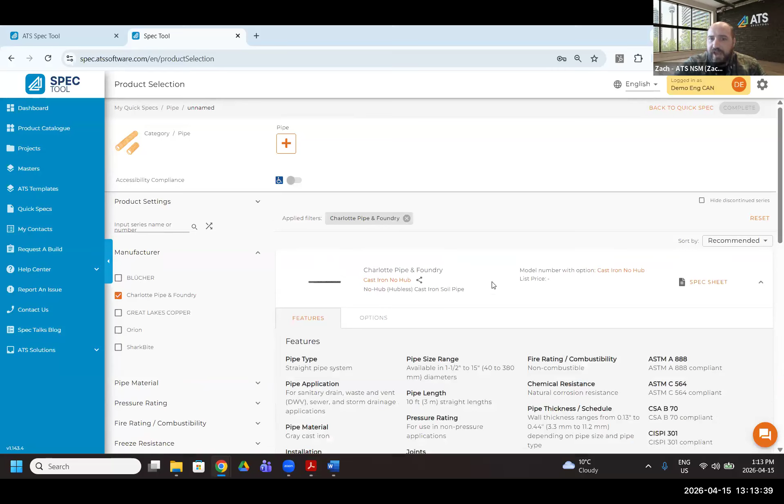So if we want to go in and select and start specifying our pipe, we could make our selections here. We can filter down by different ratings, pressure ratings, application type areas. You could filter by manufacturer - so if we want to see Charlotte pipes, we find their general cast iron pipe here. It tells us all the ratings that it has. Hit add product, and it would take us into what we call our fixture chain, where it's going to suggest the other necessary components - your tees, wyes, and crosses.

We can add our fittings in, and then it's suggesting hangers and supports. It's suggesting those no-hub couplings, pipe identification as well. We can skip to the coupling, or we can hit complete and skip directly to our download. And then we could rename this pipe and download the project selection here at the bottom.

However, there's one other part - I mentioned the masters. One of the key reasons of using the system these days is to, one, keep your master up to date, and two, ensure your entire team is working off the same approved selections. So I'll use an example here.

In this quick drawer, we have your masters, and then we have ATS templates, which is essentially ATS's masters that we've provided here as a means of improving your experience on the system. Your master would be like this Charlotte pipe master here, where we've got cast iron pipe, the edge pipe, CPVC, and PVC. Those might be the ones that are approved for your particular firm.

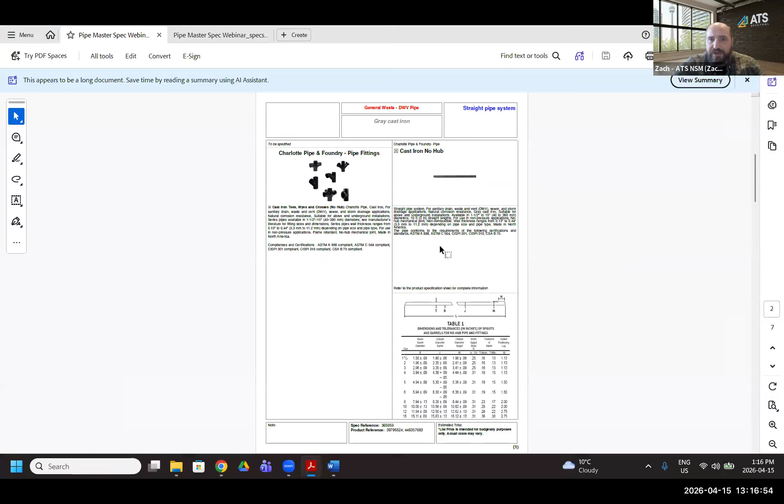Lastly, once you're done, you'll download this in any of our different formats. We've got submittals, schedules, 3 different types of written specs, the manufacturer spec sheet, Revit files for everything. And I always assume that I'm going to be a little bit late, so I pre-downloaded here. It just looks something like this - gives you exact model name and number of what you've selected, the key important details.

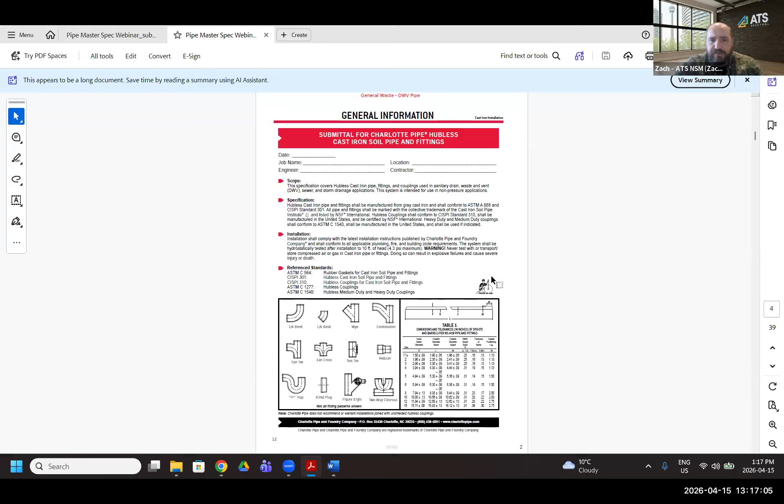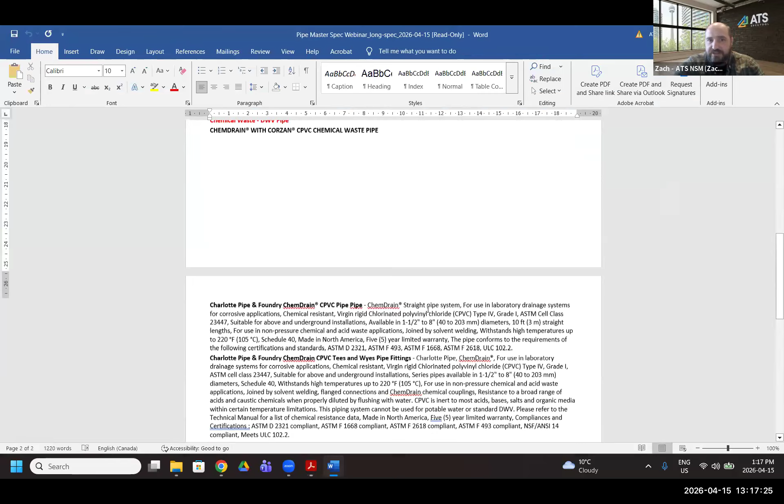The manufacturer spec sheet, very similar, gives you a table of contents and then the manufacturer's details. In terms of written spec, everything, all of our formats are open and editable. So we could simply copy and paste this into your internal project book spec. However, if you are issuing the spec to market, if you need a schedule, then we'd give you the schedule. But a little bit more detail - calls out the specific standards, but also calls out some important aspects of the product to ensure we're raising the bar a little bit.

And you just get a nice zip folder here, something like this, that gives you all the different formats that you could then take from. So long spec, short spec, CSI 3-part spec, schedules, submittals, brochures, all those different formats. One of them is going to align with how your firm writes a spec and delivers it to the market. All of it is sponsored by our manufacturers so that you have better access to better data, better information.

With the goal of improving accuracy in how it goes to market. An accurate spec on the front end leads to quicker and more accurate quotation on the back end, which leads to easier distribution for all of the manufacturers. So that's all the goal and how it all ties together. ATS is really just taking the data and trying to provide easier ways of accessing it and easier ways of keeping it up to date.